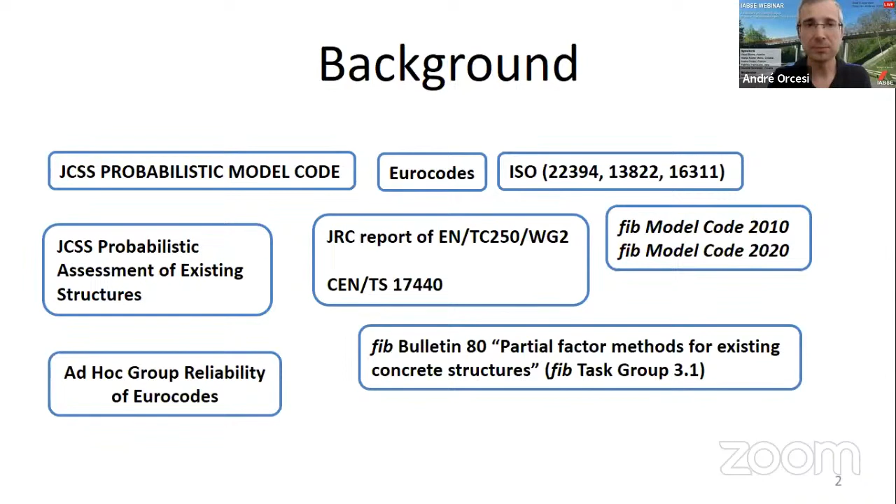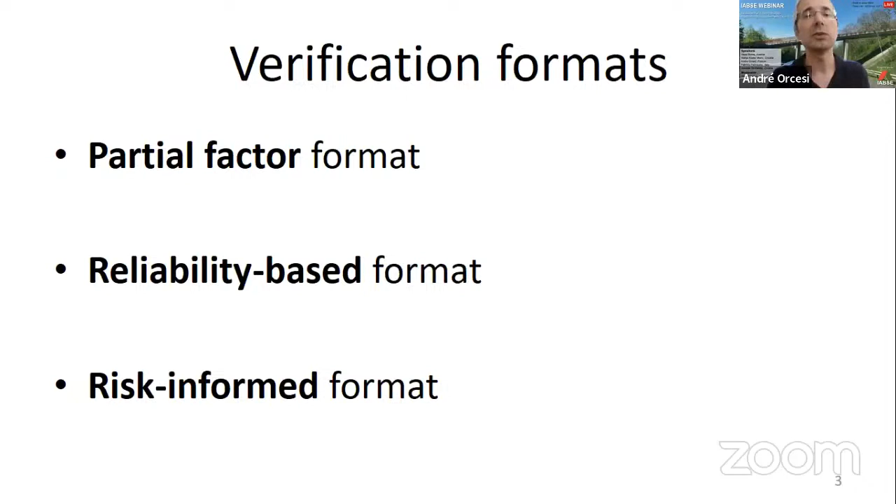There are three main formats that we can develop, and today we are going to talk about the two first ones. The first one is the partial factor format, using partial factors, and the second one is the reliability-based format. Then if you include the consequences, you can reach the risk-informed format.

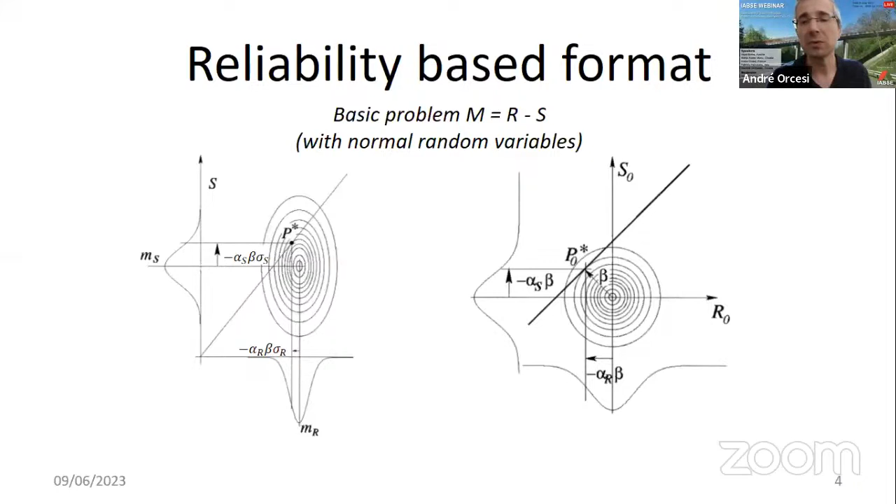So just a few words about the reliability-based format: in this format we consider a probabilistic level for the different variables, and we try to research what we call the design point in the standardized space that you see on the right. Then when we find this point, we come back to the physical space of the variables to identify this design point, and then it is possible to move to the partial factor format.

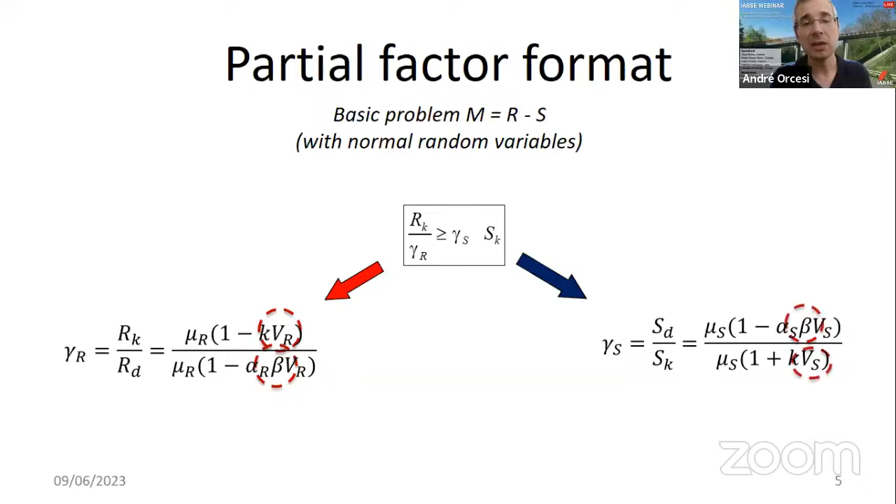So whether it is a resistance variable on the left or an action variable on the right, we calculate this partial factor as a ratio of a characteristic value and the design point value for this particular variable. This implies having information on the variability, like the coefficient of variation, and what we call the reliability index, called beta. So this was some kind of basic problem, but we can generalize to different types of variables.

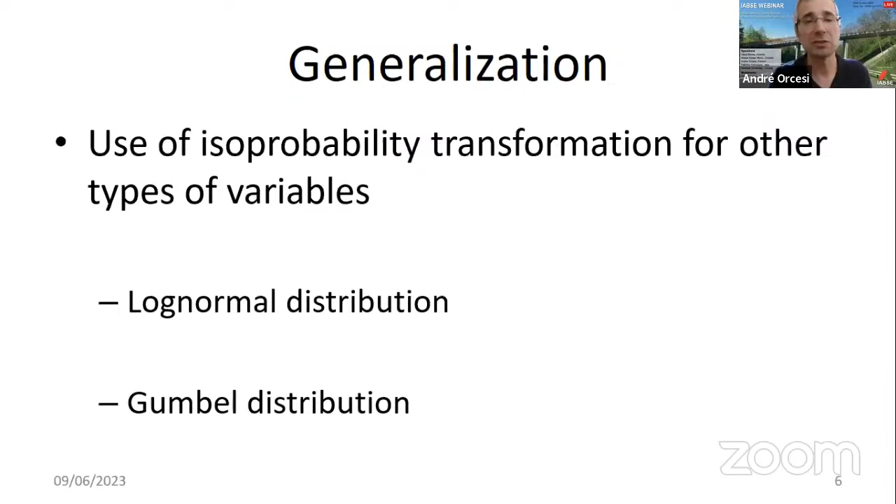I showed some results for normal distributions, but there are several other distributions like log-normal or Gumbel distributions that we manage in this type of assessment problem.

And then we come to the formats that are generally used when assessing structures, relying on partial factors. It can be fixed partial factors, considering a cluster of cases, and then we fix the partial factors to be used in the determination of the assessment effects, the EA, and the resistance variables, or we can move to a format where we try to adjust the partial factors if we have additional information for a particular case study.

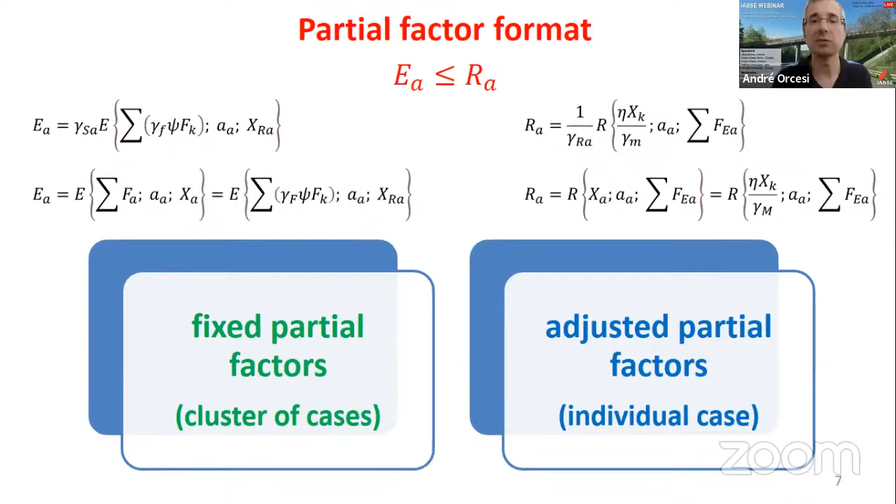So today we are going to illustrate that with case studies. And what we will also illustrate, relying on recent documents from the Eurocodes and FIB as you can see on the top right, is that when we try to adjust the partial factors for individual case studies, we can do that in different ways.

We can have what we call a single partial factor, where one factor for a particular variable will cover the different types of uncertainties—material property, geometrical variables, and resistance uncertainties—on the left. Or we can separate the partial factors if we consider first the material property, then the uncertainty of the resistance model, and the uncertainty of the geometrical variable. We will illustrate these two different ways of considering the uncertainties when we try to adjust the partial factors.

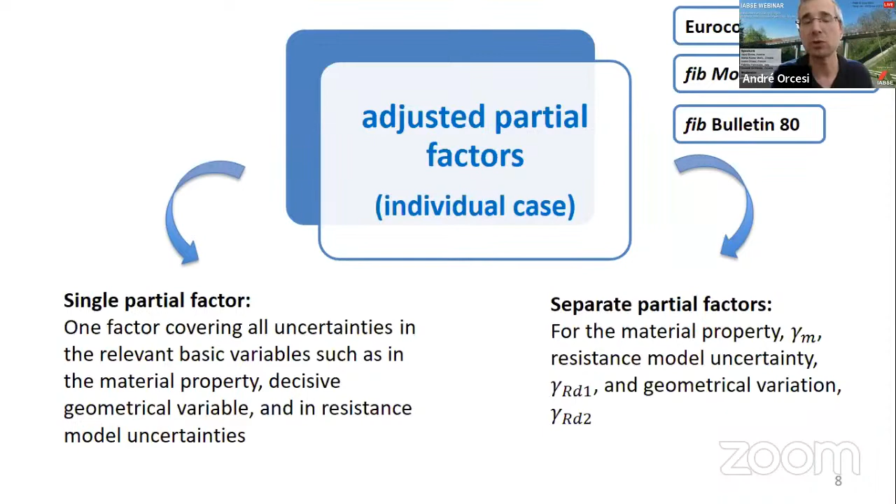Now I will shortly introduce the two case studies that we will present today. The first one is a reinforced concrete slab bridge built in Germany in the 1970s, and you see here a view of this bridge. First, we will apply a semi-probabilistic format with fixed partial factors.

Then we will show if we adjust the partial factors relying on single partial factors as well as separate partial factors. What will be presented is the influence of the number of in situ concrete tests when we try to get information from in situ. And then finally we move to the higher level of assessment, the full probabilistic analysis applied to this case study, relying on what we call the first-order reliability method.

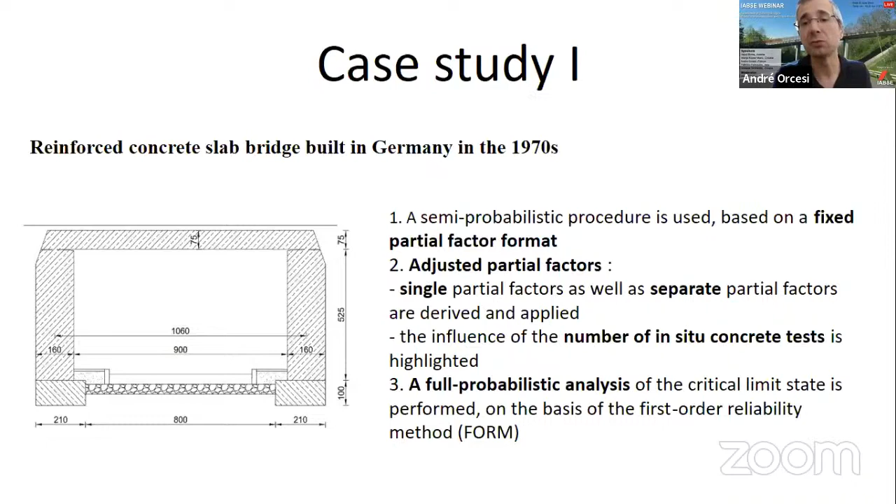Then we will present a second case study, a continuously reinforced concrete slab bridge built in 1961 in Croatia. We will have a similar three-step approach, starting first with fixed partial factors, then adjusting the partial factors, and moving to a full probabilistic analysis. We will illustrate the results using both the LM1 action model from Eurocode and site-specific traffic load models, to show these differences with this case study.

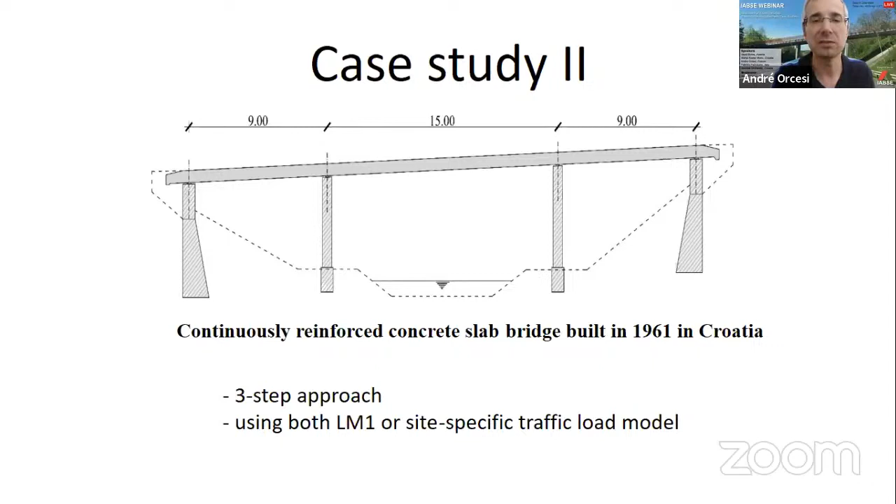Finally, the results presented today will be available soon in a SEI journal paper from the IABSE journal. This paper is almost in the way of being published, so you will have more information soon available with this paper. And with that, I finished this short introduction, and I'll give the floor back for the next presentation.

I will talk about the first example, case study number 1, including a brief introduction on the case and the material partial factors. Then the case will be completed by Vazul Boros immediately after me.

The background: this is a very simple bridge. For this example, we drew inspiration from a real case study, but we made some changes to the original one in order to better highlight issues relevant to probabilistic and semi-probabilistic approaches. This bridge is a reinforced concrete bridge built in Germany about 50 years ago. The analysis will be limited to the deck, which is a 75 centimeter deck with a net span of about 9 meters.

The assessment of concrete strength has been done directly on the deck using the approach given in EN 13791 by drilling 8 cores and calculating the in situ characteristic value of concrete using the approach given in section 8. I don't have much time to go into detail, but all the data are given in this section of the code.

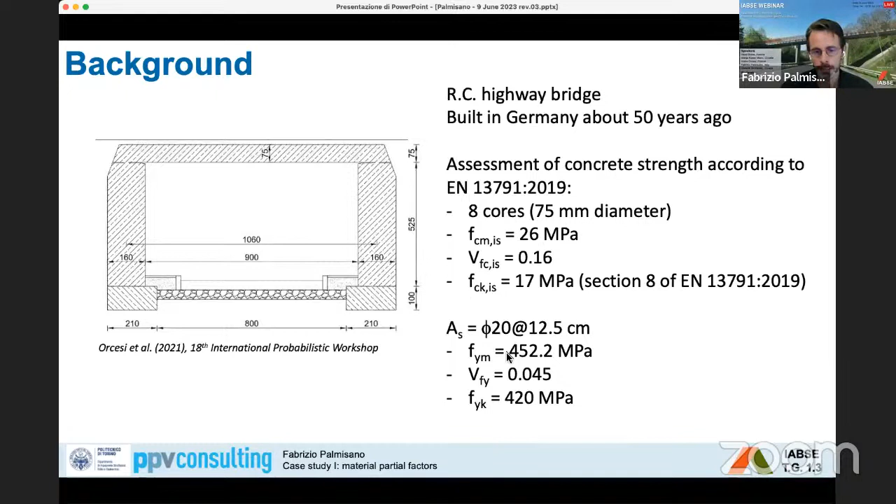The reinforcement of the slab is composed of 20 millimeter bar diameter with a spacing of about 12 centimeters. The yield strength has been assessed by taking samples and testing in the laboratory, and the characteristic value has been obtained using a log normal distribution.

Before talking about the material partial factor, we have to determine FCK, the characteristic value of concrete strength, from in situ tests, because what we obtain from EN 13791 is the value of FCK in situ, derived from test cores drilled into the concrete. However, all the formulations given in the code, for example in the Eurocode, make reference to FCK. So it is necessary to pass from FCK in situ to FCK.

I will show you the approach that we have used, which will also be given in the case study in the forthcoming Annex I of the second generation Eurocode.

This approach is based on the assumption that the in situ strength is the product of 3 parameters: the resistance of a cube specimen of concrete FC, a parameter eta core actual that is a reduction factor accounting for damage sustained during core extraction, and an in situ factor eta IS which takes account of the effect of curing, effect of consolidation of fresh concrete, and anisotropy.

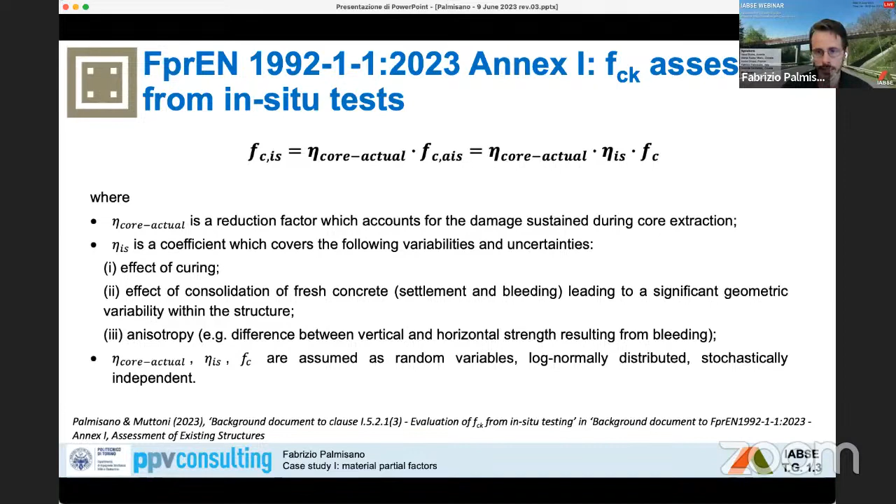These variables are assumed to be random variables, log normally distributed, and stochastically independent. By assuming the parameters given in the new Annex A of the second generation Eurocode, and others taken from a recent study by Moccia et al. 2020...

...it is possible to obtain a factor applicable to FCK in situ to obtain FCK. And this factor in this case is more or less equal to 0.85.

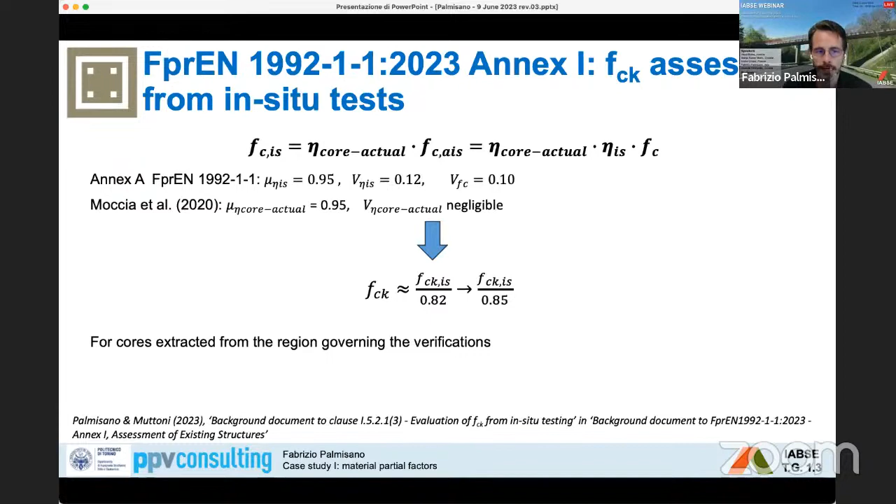However, we should take into account that in some cases the cores are not taken directly from the region governing the verification. In those cases, we have to consider also the difference in resistance between the top and the bottom of the member or element.

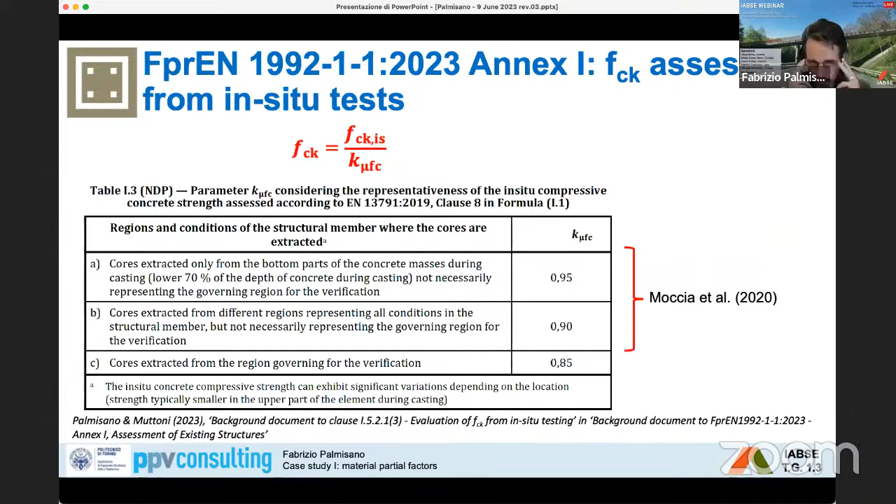The Eurocode has used a recent study by Moccia et al., and by using this study and the same approach I already showed, three different coefficients are derived for these cases. All the details will be included in the background document to Eurocode 2.

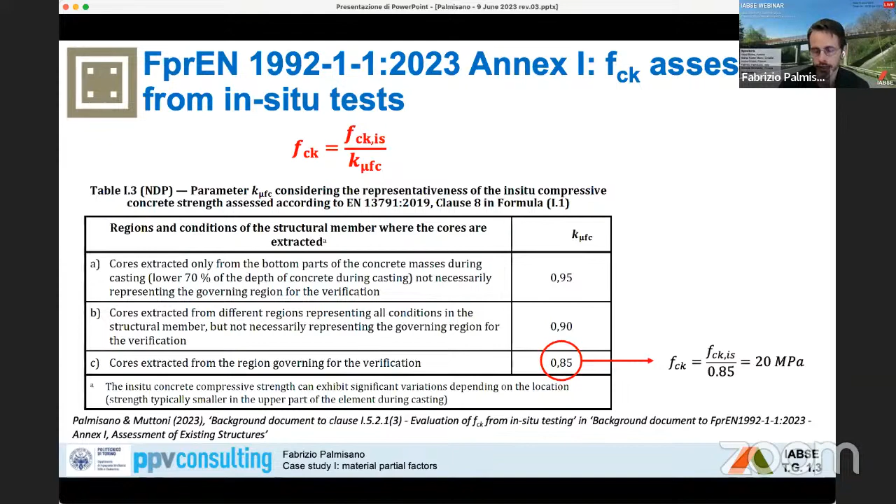However, in our case study, the cores have been drilled directly into the deck, so the coefficient to be taken is 0.85 and FCK is equal to 20 megapascal. Let's move to the partial factor.

First, we have to talk about the fixed partial factors. The current Eurocode does not differentiate between existing and new structures, so we have referred to the partial factor given for new structures for a reference period of 50 years. These are equal, as we know, to 1.5 for concrete compressive strength and 1.15 for reinforcing steel.

In general, it is possible to use this fixed partial factor directly if, first, the coefficient of variation of materials is very similar to those assumed to calculate the partial factor for new structures, which is the case here, and second, if the target reliability index beta is the same as that given for new structures.

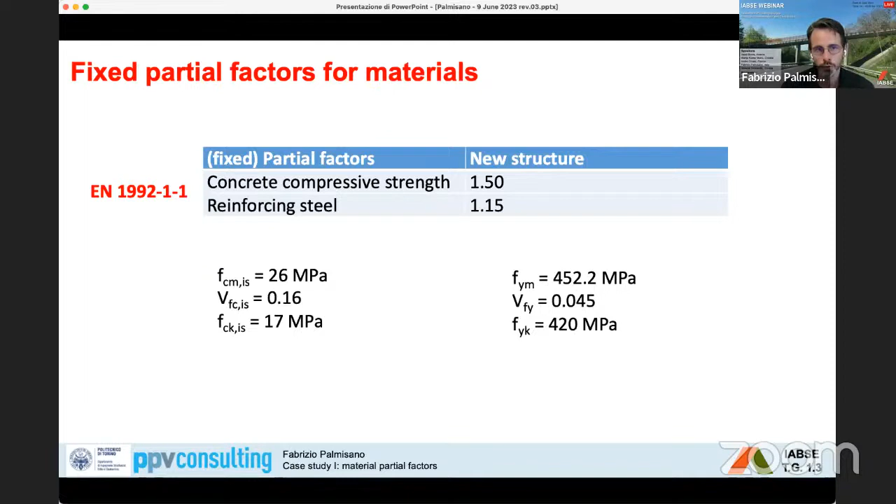In our case, we have considered an existing structure, and we have reduced, as shown in the previous webinar, the target reliability index from beta equal to 3.8 to beta equal to 3.3. So the necessity to adjust the partial factor arises.

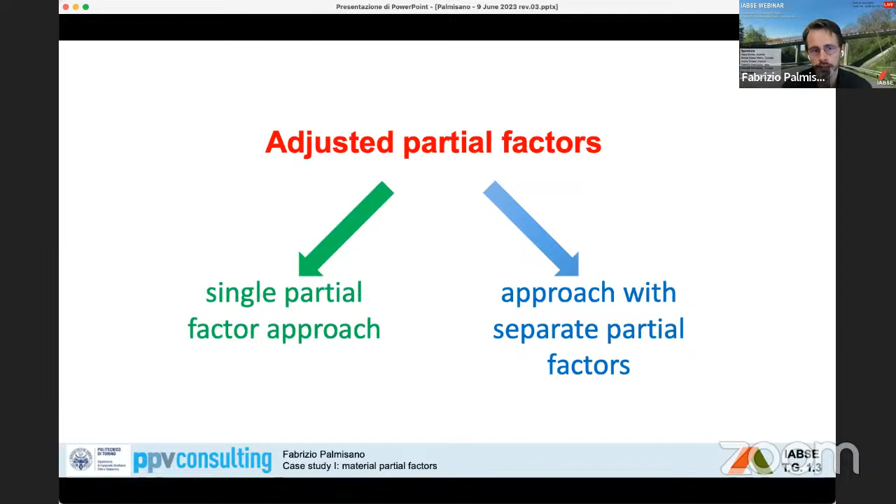So let's move to the adjusted partial factors. As Andrea has already said, we have used two different approaches: the first, called the single partial factor approach, and the second, called the approach with separate partial factors.

For the first approach, the single partial factor approach, we make reference to the forthcoming Eurocode 2 and to FIB Model Code 2020 that will include this approach. The basic assumption is that the general variable of concrete strength, RC, is a product of FC, the compressive strength of concrete determined from samples taken during casting, the in-situ factor IS, and the geometrical and model uncertainties.

All these variables are assumed to be statistically independent and log-normally distributed. By making this assumption, it is possible to calculate the gamma factor for concrete as the ratio between FCK and the design or assessment value of RC. The expression is an exponential function, which depends on the sensitivity factor.

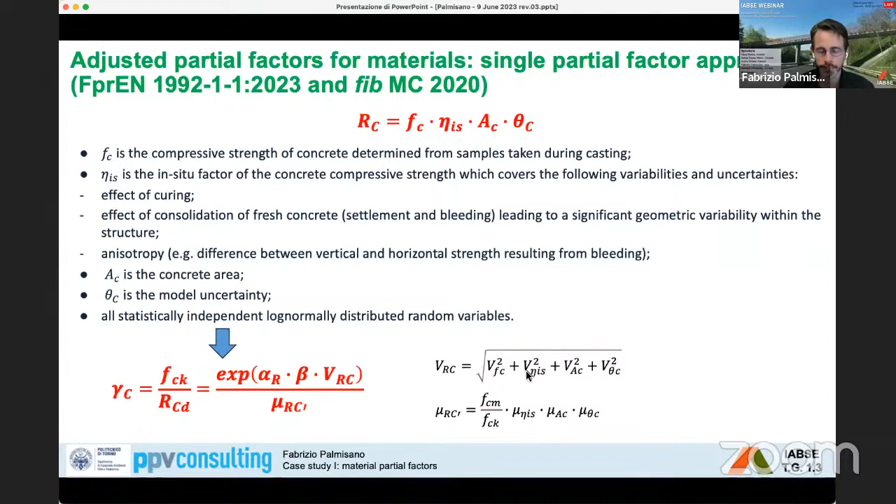For dominant variables we can assume the sensitivity factor equal to 0.8 for resistance, the beta target value—the target index that, as I've said, in this case will be equal to 3.3—the coefficient of variation of RC, which is a function of all four parameters, and the bias factor of RC, which is also a function of all parameters.

However, this formulation is correct for the structure when we assess FC, the FCK. For existing structures, we assess the in-situ value.

So a modification is needed, and this modification will also be included in the second generation Eurocode 2. It will be a function of the sensitivity factor, the beta factor, and also the number of test results, because if the number of test results is low—lower than 30—the random function to be assumed is more similar to a Student's t-distribution than to a log-normal function.

However, we can reduce this scatter by using the formulation I've just shown, by increasing the number of specimens—for example, from 8, the minimum requested by EN 13791, to 10, 16, and so on.

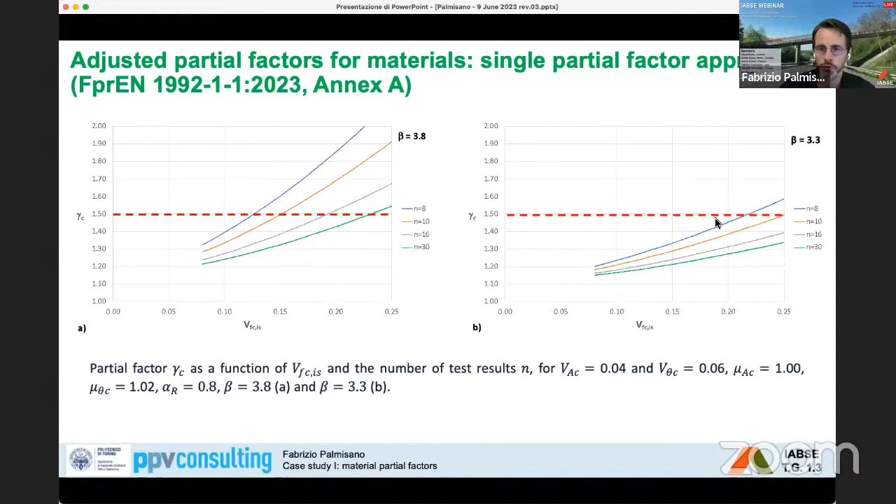It's also worth noting the great influence of the target reliability index on this evaluation. For example, if we pass from beta 3.8—more valid for a 50-year reference period for a new structure—to beta 3.3 for an existing structure, there is a strong reduction in the material partial factor. In many cases, even for a coefficient of variation of about 0.2, the material partial factor for concrete is lower than the one we assume for new structures.

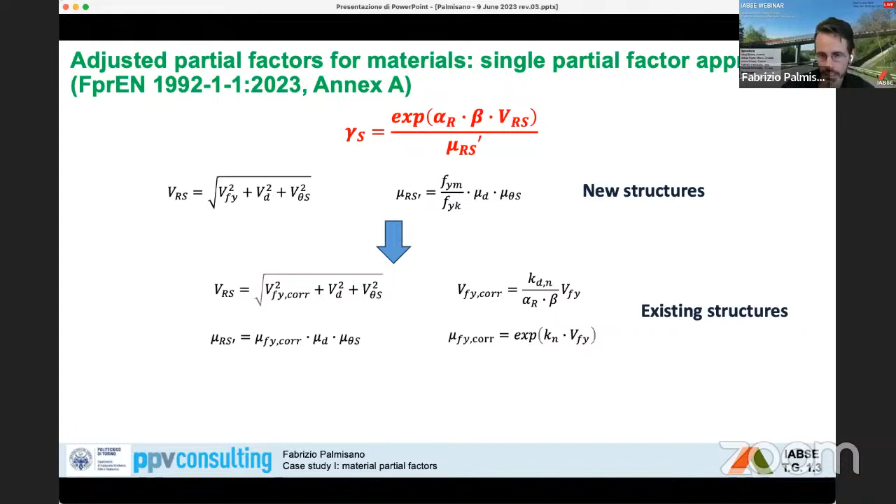The same expression is included in the forthcoming Eurocode 2 also for steel reinforcement. The only difference is that there isn't a distinction between the in-situ value and the value for a new structure in terms of strength, but the formulation is the same, with similar assumptions.

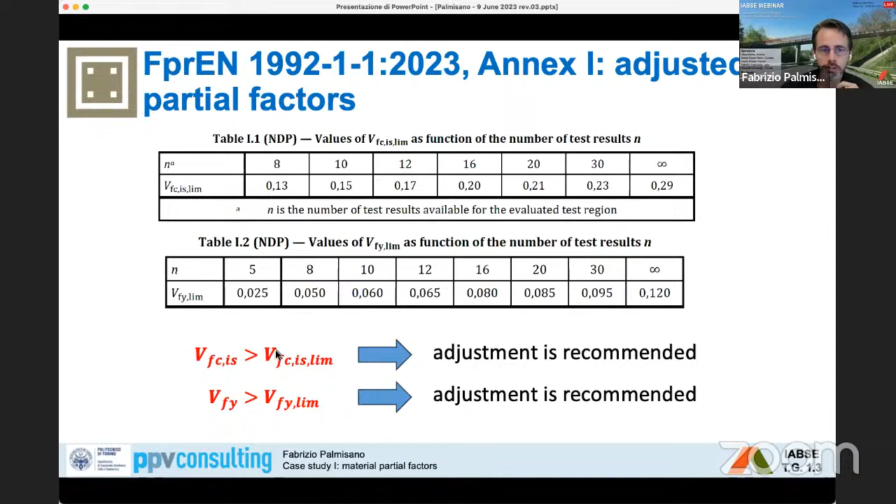It's worth mentioning that in Annex I of the forthcoming partial factor provisions, the adjustment will be recommended—not just permitted—if the coefficient of variation for either concrete strength or steel reinforcement is greater than a limit value given by this annex, which is a function of the number of test results. This is because in such cases, we are not on the safe side anymore, as shown in the previous graph.

So, by applying this approach to the case study, assuming a beta factor of 3.3, a sensitivity factor of 0.8, and all the values explained here—and better explained in the forthcoming journal paper—we obtain gamma C equal to 1.36 and gamma S equal to 1.11. Both are lower than the fixed partial factor values for new structures, and the difference is not mainly due to the coefficient of variation of material property, but mainly to the reduction we assumed for the beta factor.

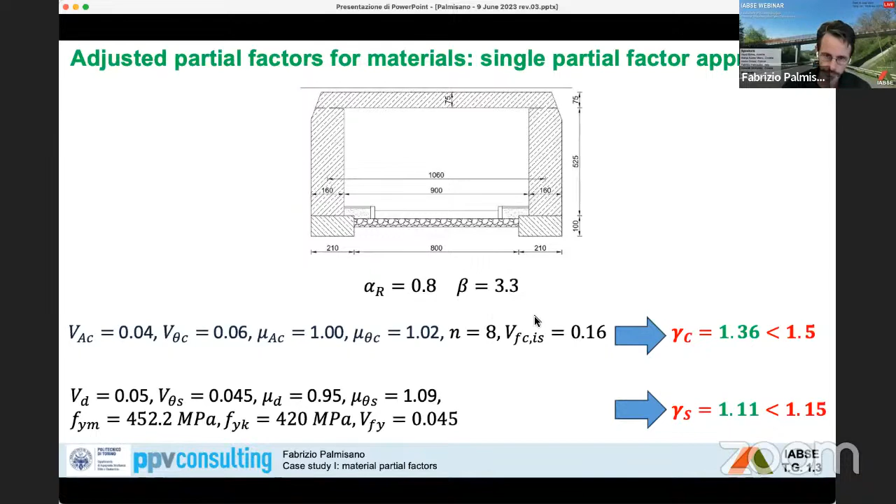Let's move to the approach with separate partial factors. This approach will not be included in the second generation Eurocode 2, and in the Model Code 2020. So we have made reference to the fib Bulletin 80.

In this approach, the gamma factor for material is the product of 3 different partial factors: one takes account of the uncertainty relevant to the materials, another to the resistance model uncertainty, and another to geometrical uncertainty.

The peculiarity of this approach is that we can assume a sensitivity factor, for example, equal to 0.8 for a dominant variable such as the material resistance, while at the same time assuming a different sensitivity factor for other variables. For example, for non-dominant values, according to König-Hosser 1982, it can be assumed as 40% of the value assumed for dominant variables.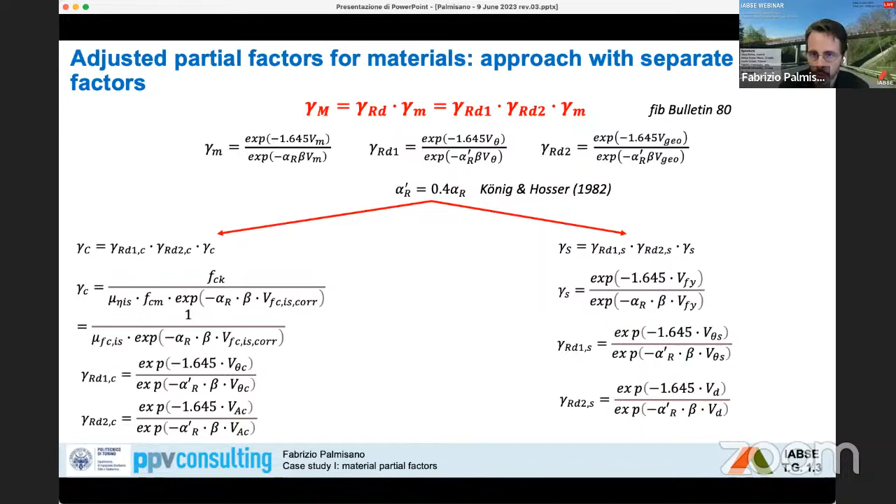So by making the same assumption as the previous approach and performing some calculations, we can obtain the specific formula to be used in the approach with separate partial factors. Again, all the details will be included in the journal paper.

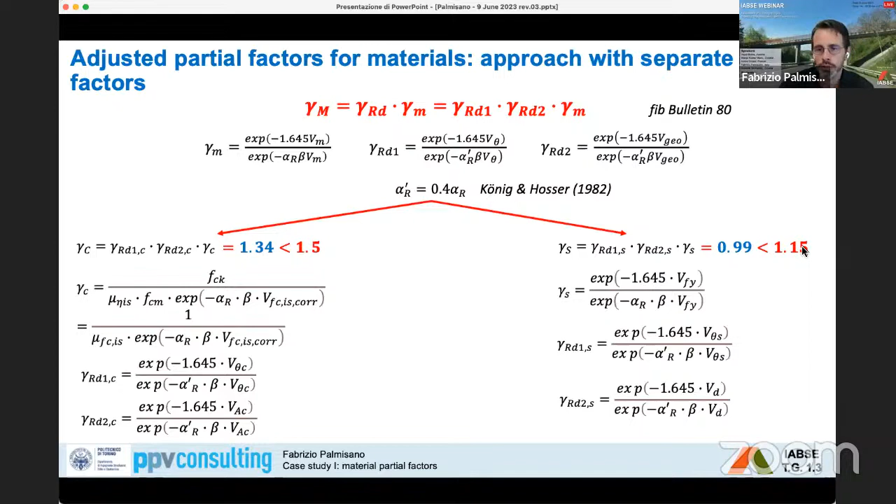For the case study, we obtain that the concrete gamma factor is equal to 1.34, while the steel gamma factor is equal to 0.99. In both cases, again, they are lower than the one for new structures, and again, the main difference is due to the assumption of a lower beta factor.

So let's conclude by comparing the 3 different approaches. Using the adjusted partial factor method, in all cases, since we have reduced the beta factor and we have a coefficient of variation of materials very similar to the one assumed for the structure, we have a reduction of the partial factor from the fixed partial factor method to both methods of the adjusted partial factor.

However, we can see a very important difference between the two approaches of adjusted partial factor with reference only to steel reinforcement, because for the case of concrete compressive strength, the results are very similar. For steel reinforcement, there is a reduction of more than 10%.

This reduction is mainly due to the possibility, in the approach with separate partial factors, to use different sensitivity factors and to use only the greater value of the sensitivity factor for a dominant variable. In cases where there are variables with very similar coefficients of variation, this approach avoids overestimating the material partial factor, as happens in our case study.

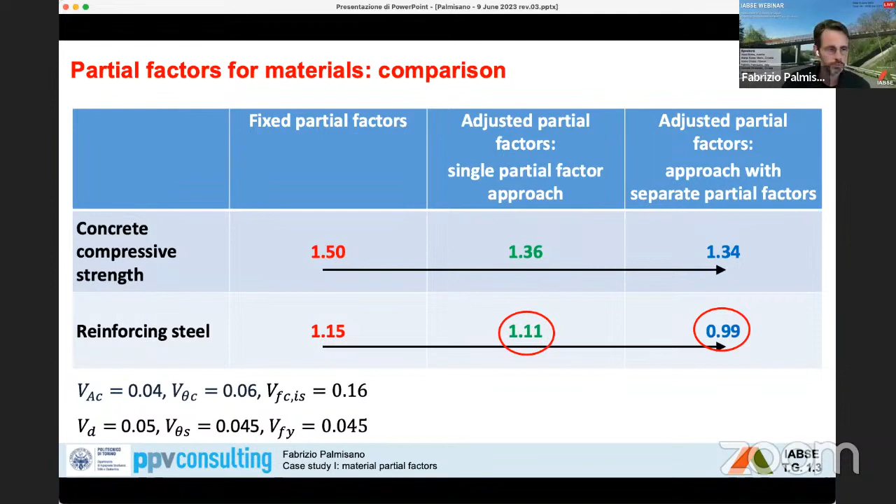And with this, I've completed my example, my part, and I will pass the baton to Vazul. Thanks a lot for your attention.

Yes, thank you very much. So I will continue now with the action part for case study 1, and also introduce you to some of the results that we obtained from these approaches. Obviously, this part of the presentation will be very similar in structure to the previous one.

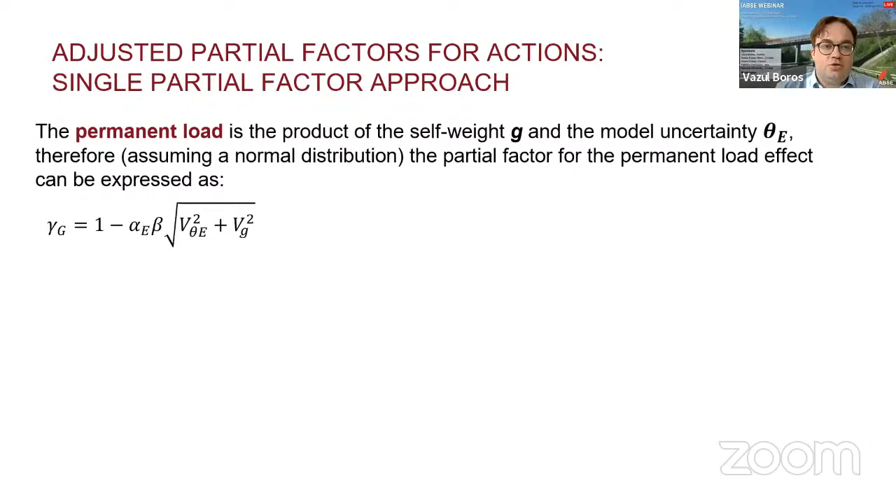So first, I'm going to talk a bit about the partial factor formats, starting with the single partial factor approach. Here, just like with the resistances, we distinguish between concrete and reinforcement steel. We need to distinguish between the permanent loads and the live loads or traffic loads in the case of the bridge. The permanent load basically consists of the self-weight itself, and just like with the resistances, also the model uncertainty. Therefore, if we use the single partial factor approach, the variation coefficient also consists of these two factors—it's basically the square sum of the two.

Also for actions, we need to consider the sensitivity factors, which are here 0.7 or minus 0.7, just like given in the Eurocodes. And of course, also on the action side, we reduce the reliability index for existing structures to 3.3 for a 1-year reference period.

What is, of course, different here is the coefficients of variation. So we have a coefficient of variation for the model uncertainty and for the self-weight of in situ concrete, both taken based on the FIB Bulletin 80. If we calculate the adjusted partial safety factor with these values, we obtain a partial safety factor of 1.2, which is also significantly lower than the 1.35 that we would use for a new structure.

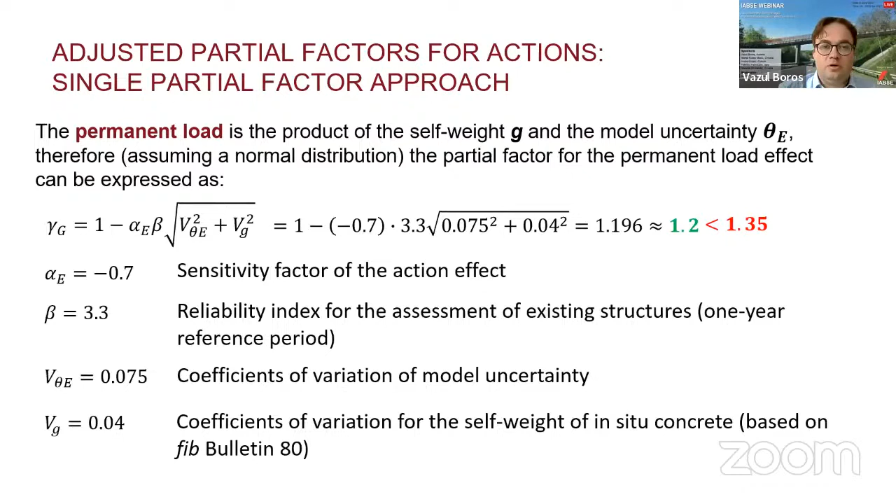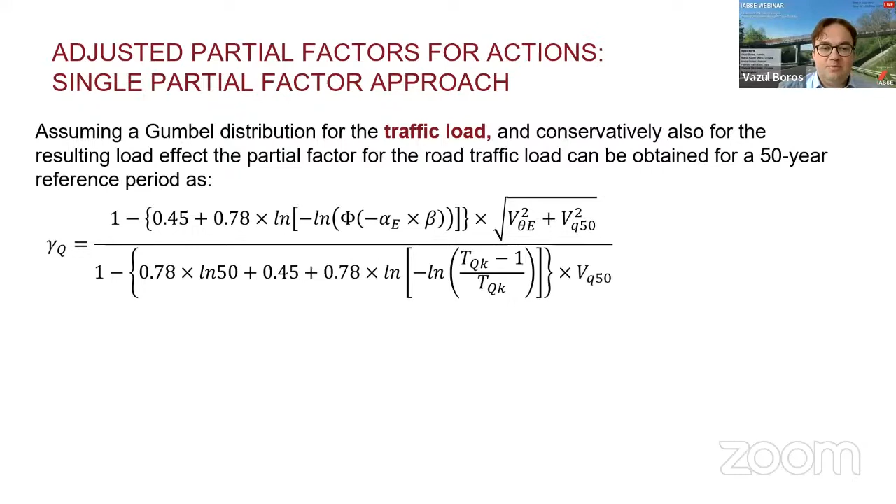So if we move on to the single partial factor approach for the traffic load, we have to assume a Gumbel distribution according to the FIB Bulletin 80, which makes the calculation a bit more complicated. However, the principle is the same—it basically only depends, once again, on the sensitivity factors and the reliability index, which is significantly reduced.

Once again, the coefficients of variation, both for the model uncertainty and also for the traffic load, are of importance. And one additional thing for the traffic load which is important is the definition of the characteristic value of the traffic load, which in the Eurocodes is given as the load with the 1,000-year return period.

And then if we calculate the partial safety factor for Gumbel distribution with these parameters, we get a significant reduction of 1.17 instead of the 1.35, which you would have for traffic loads.

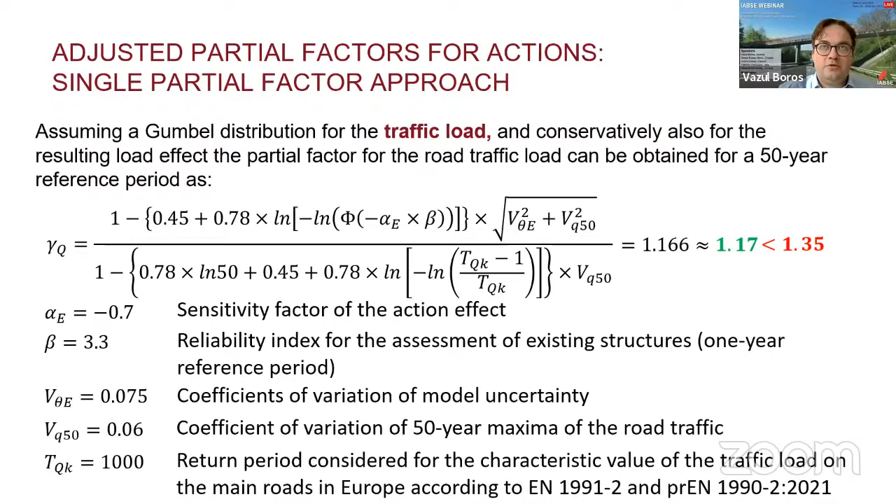So this was the single partial factor approach, and now we will also address for the actions the approach with separate partial factors, as shown in the Fib bulletin.

So here, as we've seen before, we can also divide up the permanent load into the product of a safety factor for the self-weight itself and another one for the model uncertainty.

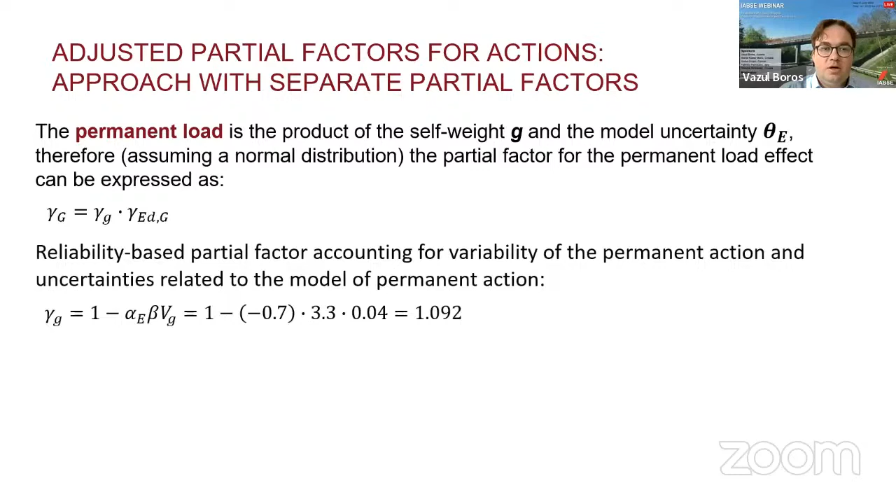The self-weight itself could be calculated to a partial safety factor of around 1.09, and the partial safety factor for the model uncertainty also here can be reduced with the factor of 0.4, as Fabrizio has explained, for the non-dominant part, which in this case is the model uncertainty.

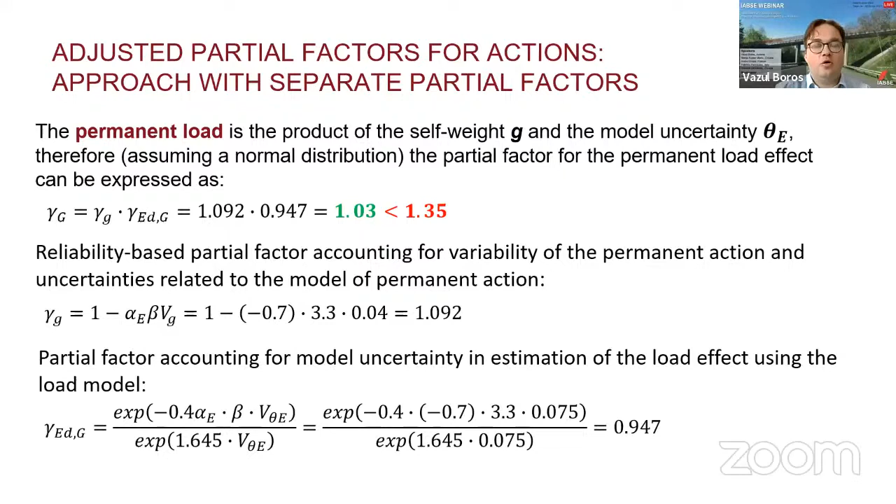And once again, if we multiply these two partial safety factors, we get the overall safety factor of 1.03, which is significantly lower than the 1.35 you would normally have.

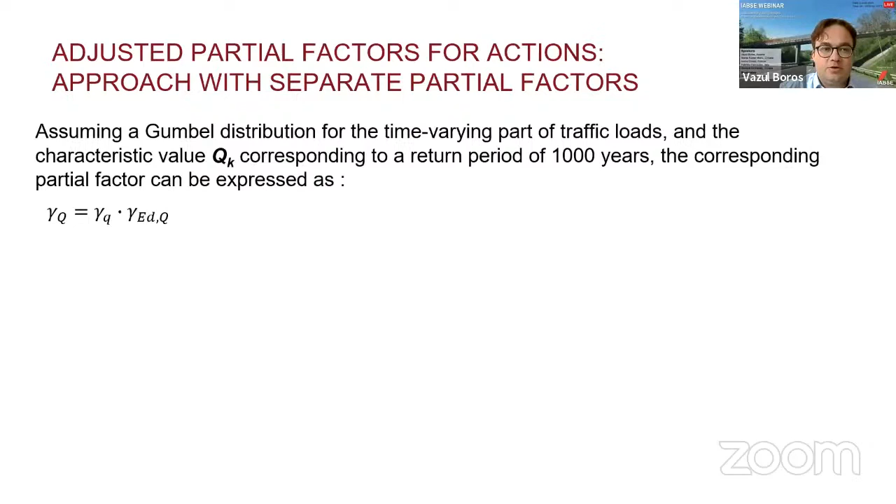So if we look at the separate partial factor approach for the traffic loads, we still assume the Gumbel distribution. And also here we divide it up into the partial factor for the live load itself and the model uncertainties. For the live load itself, with the Gumbel distribution, we can obtain a partial safety factor of around 1.07. And for the partial factor for the load uncertainty, once again with the reduction of 0.4 for the non-dominant basic variable, we get also around 1.07.

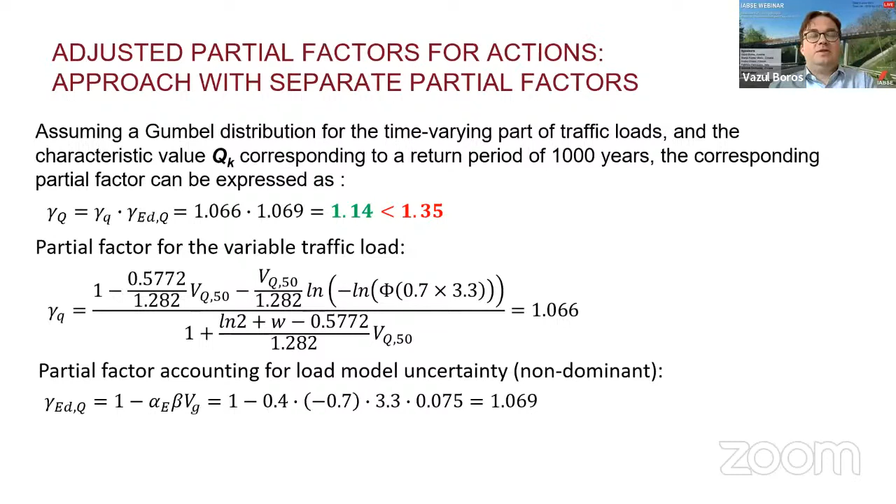So in total, the partial safety factor for the live load would be 1.14. So lower once again, as we would normally use with 1.35.

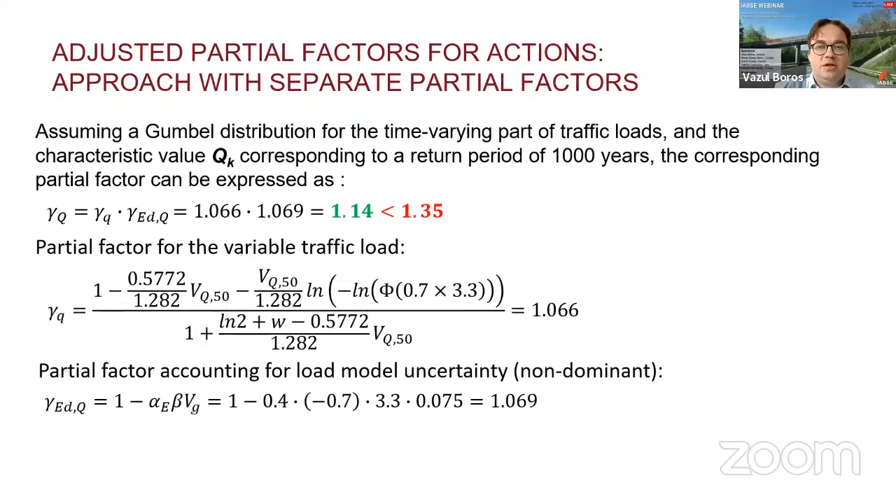So in the case of the actions, we didn't do any real measurements like we did with the resistances, but what we could do is something similar, which is to do some traffic simulations, actually considering the geometry and the load of the bridge. So here we assumed 5 different types of lorries, which we took according to the fatigue load model 4 of the Eurocodes, at least concerning their geometry - the axles and the axle geometry.

However, when it came to the weight distributions, since this was a bridge in Germany, we used some measurements which were, first of all, more recent than the Auxerre traffic that was considered in the Eurocodes back then, and also more close to our bridge since it was taken from Germany. This is all with the exception of Lorry 2, where no data was available, so there we had to refer to the Auxerre traffic. So anyhow, these were the weight distributions for the vehicles that we considered and the geometry.

And another issue which we asked ourselves is which type of dynamic amplification factor needs to be considered. So after some discussion in the group, we decided on an approach where the dynamic increment is basically decreasing with a higher weight of the vehicle, as you can see here. So basically, it is normally distributed with a mean and standard deviation of 41.5 divided by the vehicle weight in kilonewtons. So these were basically the parameters for the simulation.

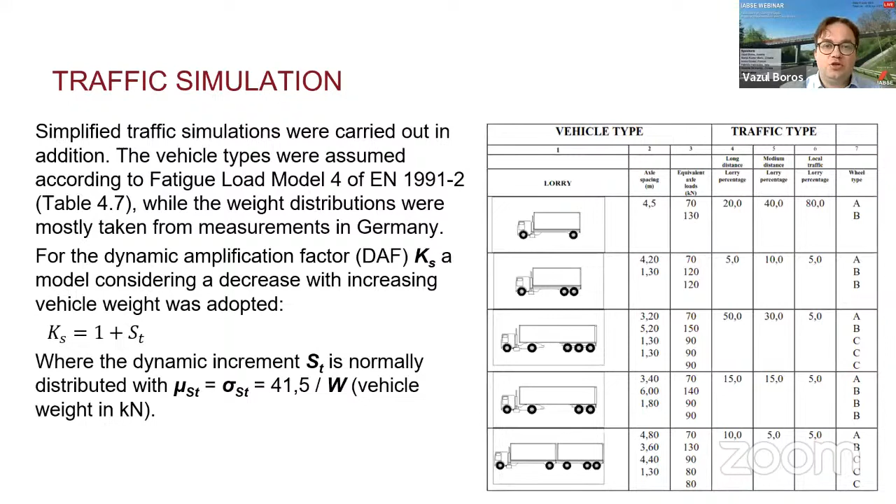And we simulated 2 years with 280 work days and distinguished different traffic categories, which are at least typically defined in the Eurocodes. So for the motorways, one with 2 million vehicles per slow lane a year, and one with 500,000 vehicles. And we also considered the probability of a second vehicle in an adjacent lane.

And after that, the results were approximated by a Gumbel distribution, as it is given, for example, in the Fib bulletin 80, and also in a more generalized approach with the generalized extreme value distribution. And if you compare the characteristic values which we would get from these approaches, you can see that while there is a difference, it's not very significant. And what is even more important, the characteristic values obtained are about half of that what you would get if you would use the actual load model 1 from Eurocode 1.

So there is a tremendous potential in reducing the traffic loads on the bridge if you consider the real bridge traffic and geometry. This is actually in line with several investigations which have shown that for short span bridges, the Eurocode model is rather conservative.

For this bridge in particular, we could see that this is really very much the case. If you are more interested in these traffic simulations, there has also been an IABSE paper at the conference in 2021 in Ghent, Belgium, where we discussed these calculations in more detail.

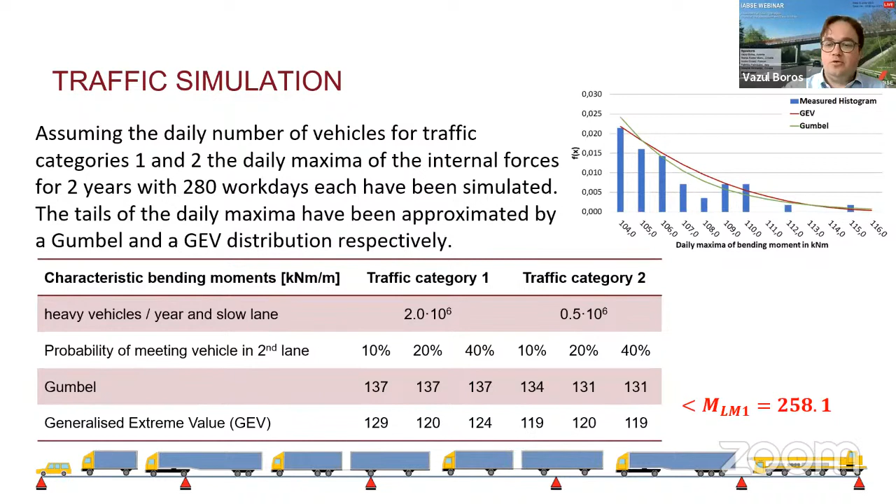And if we consider the simulations I've just shown, you could further decrease the characteristic loads for the actions, which would further reduce these percentages by about 20%. So you would be able to prove that the structure is actually safe after all.

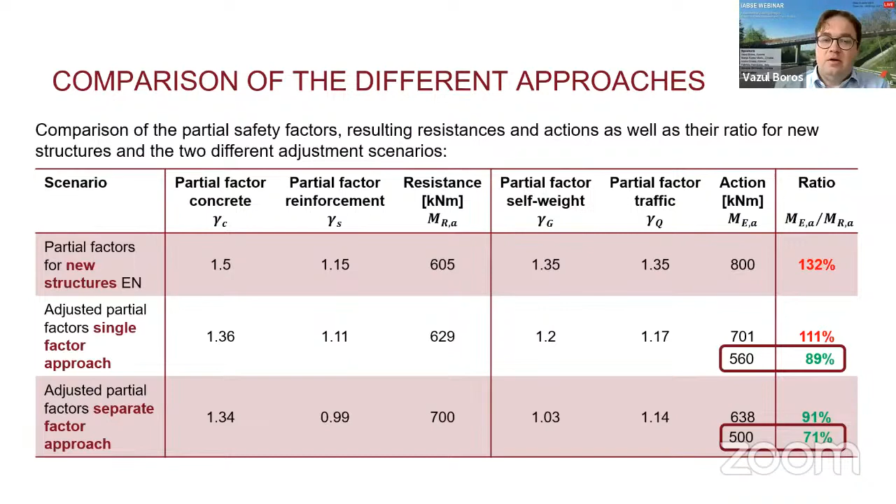As we said, there has also been a further, more sophisticated approach to check the safety of the structure: a full probabilistic analysis using the First Order Reliability Method, FORM. This basically used the formulas for calculating the bending moment resistance and the acting bending moment, based on the notations shown in the present picture.

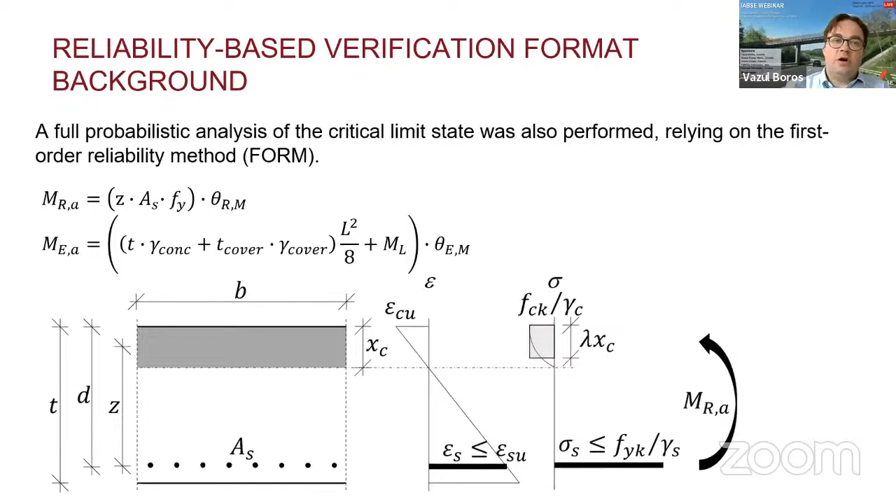What is even more important for such a probabilistic analysis is the basic variables assumed. On the resistance side, it was the concrete compressive strength and the steel yield strength, as well as the slab thickness, which also had some effect on the self-weight, and of course the model uncertainties for resistances. On the action side, it was the concrete density, the bridge span as a geometric parameter, and the density of the cover—the asphalt layer—as well as its thickness, and also the model uncertainty and the moments due to traffic.

But here we distinguished case 1, which was basically the Gumbel distribution based on fib Bulletin 80, and case 2, where we also used the Gumbel distribution but from the simulation, with a significantly lower level and also a lower coefficient of variation.

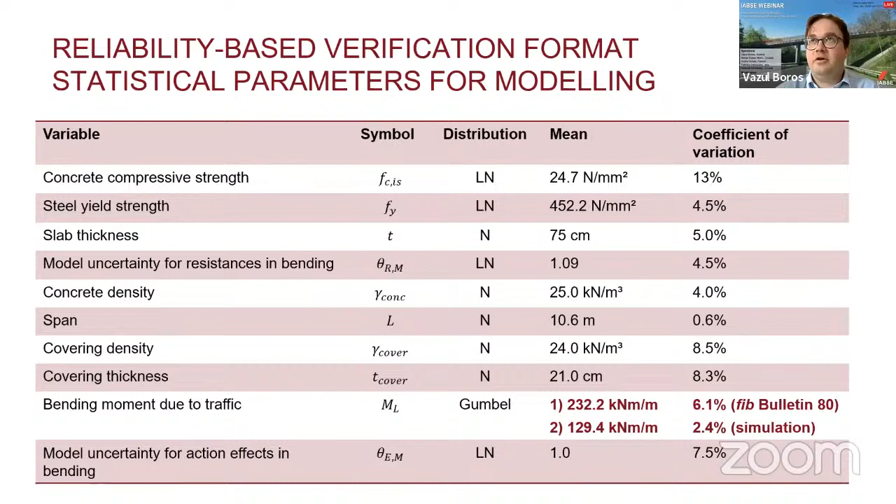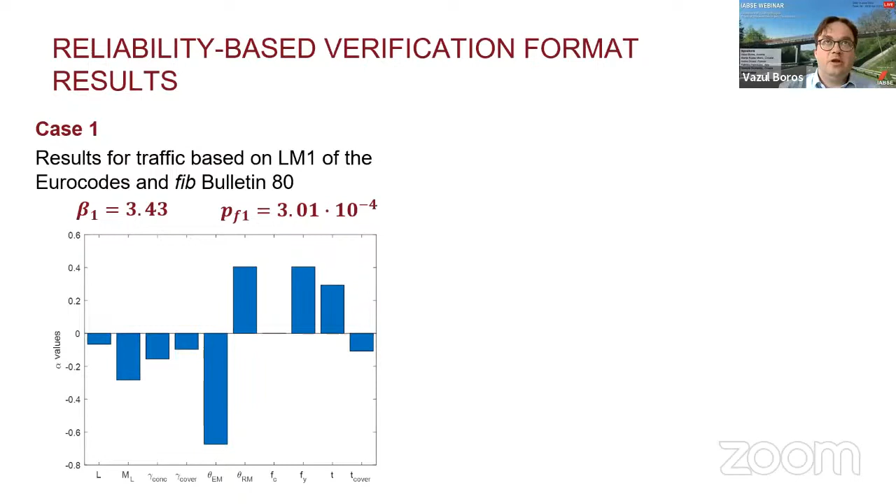So if you compare the results, for case 1 we got a reliability index beta of around 3.43, which aligns well with the calculations using partial safety factors, since we were approximately around 100%, depending on which way you look—90 to 110—with a reliability index of 3.3. And if you look at case 2 with the simulations, the reliability index increases significantly, so there a much higher reliability could be proven.

Maybe what is also interesting to note is the sensitivity factors of the different basic variables. You can see that with a decreased characteristic value in the traffic loads, the sensitivity of the moment due to traffic decreases significantly. And what I think is also interesting is that the model uncertainties of both actions and resistances have a very high influence on the results.

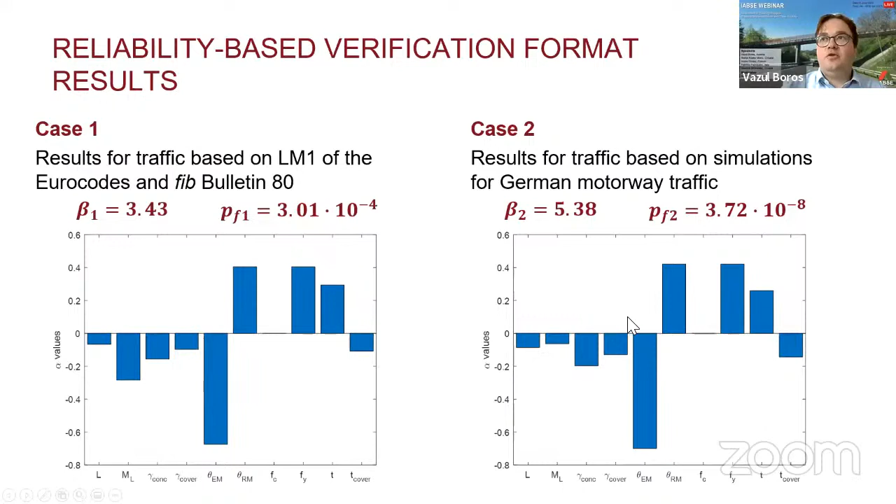So this was the summary for case study 1. And now I hand over to Maria for case study 2.

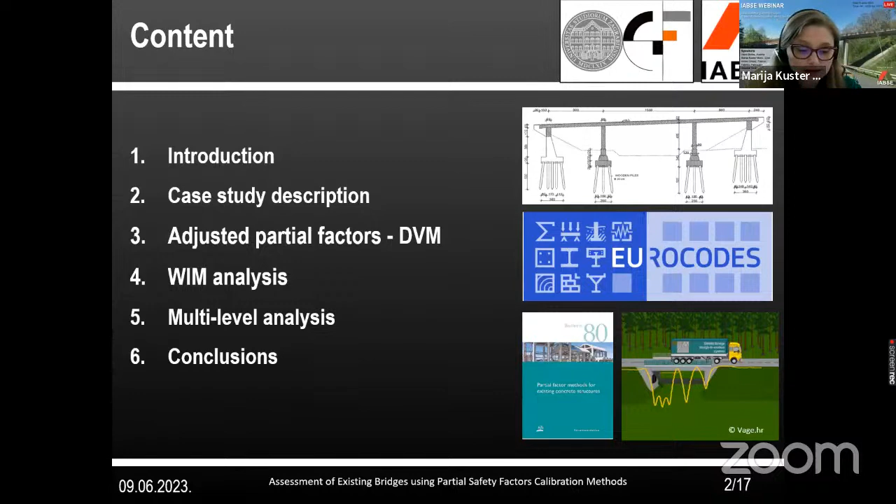The Croatian case study is prepared by Ana Mandić-Ivanković, Dominik Skokandić, and me, and will be presented by Dominik and me. I will start with the introduction, bridge description, and application of the design value method proposed in fib Bulletin 80. Then Dominik will continue with the WIM analysis, multi-level assessment, and conclusion.

So let's start. The second case study is a 3-span girder reinforced concrete bridge on a state road in Croatia. Assessment is provided in 3 steps. In the first step, the linear analysis is conducted using a semi-probabilistic partial factor format and the values for structural design of new bridges, along with traffic load model 1 according to Eurocode.

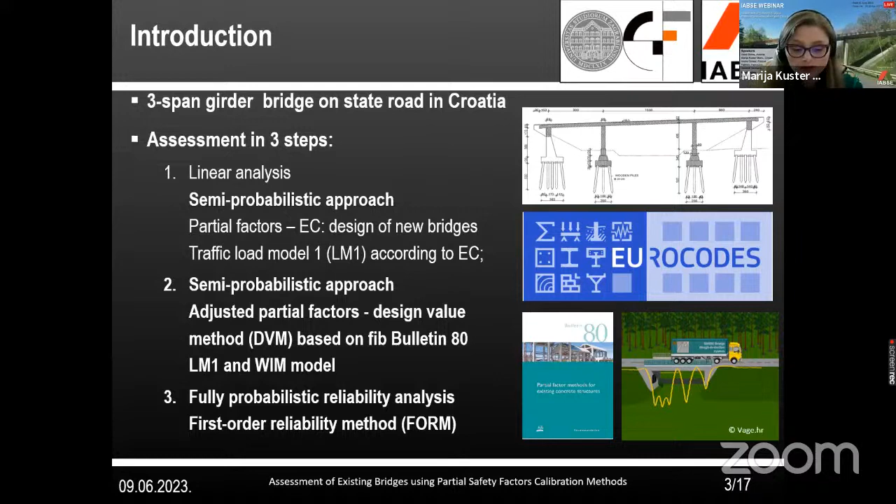In the second step, again a semi-probabilistic approach is used, but partial factors are adjusted using the design value method based on fib Bulletin 80, for both the reduced traffic load model 1 and the WIM model developed for this case study. Finally, in the third step, the assessment is performed using a fully probabilistic reliability analysis, relying on the First Order Reliability Method.

Croatian case study is Posedarje Bridge. The bridge was built in 1961. Bridge spans are 9, 15, and 9 meters, while bridge length is 33 meters.

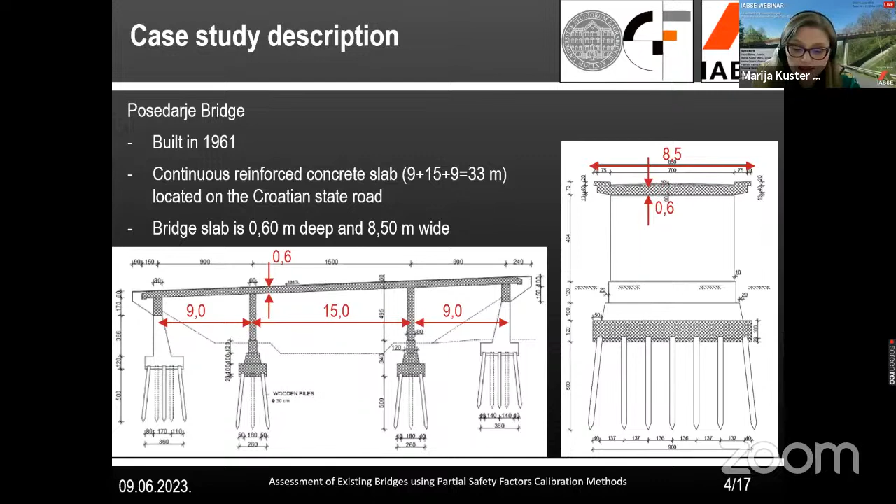The slab is supported by concrete hinges on piers and the first abutment, while on the second abutment, a movable bearing is placed. Bridge slab is 0.6 meter deep and 8.5 meter wide.

Bridge is designed according to codes from 1949, and designed concrete strength corresponds to C30/37 according to the Eurocodes, while reinforcing steel quality is S220B. Original design plans along with built-in reinforcement are available, including all structural elements.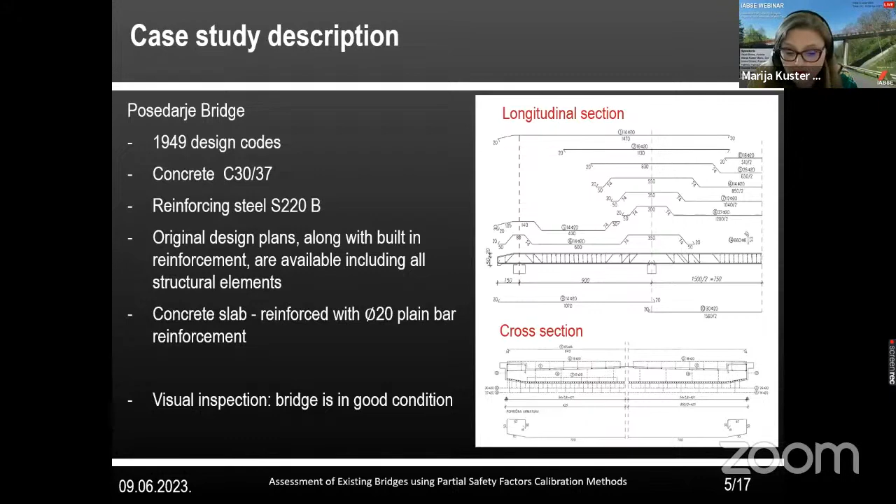In the second step of bridge assessment, partial safety factors prescribed in Eurocode for new structures are reduced using the design value method. According to draft FIB Model Code 2020, an annual target reliability index of beta 3.3 is considered for the medium consequences class.

The material factors for concrete and reinforcement are determined as shown, where gamma RD1 and gamma RD2 are recommended values for model and geometry uncertainties in FIB Bulletin 80, assuming a log normal distribution of material property. The material partial factor gamma M is obtained from this equation.

With the following coefficients of variation: 0.15 for concrete and 0.05 for steel. Alpha R is 0.7 and beta is 3.3.

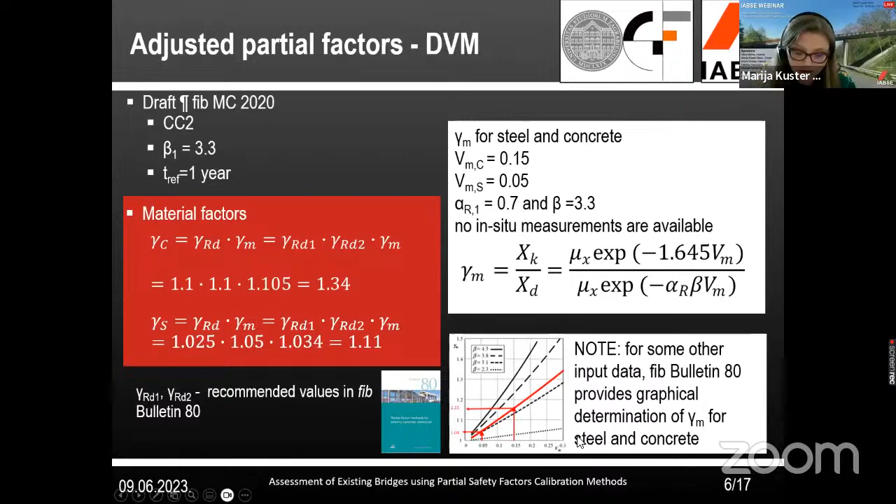Note that there is no in situ measurements available for this bridge. It's also worth mentioning that for some other input data, such as alpha, coefficients of variation, and beta, FIB Bulletin 80 provides graphical determination of gamma M for steel and concrete, which is a more user-friendly option.

Partial factor for permanent load, gamma G, is calculated using an approach similar to material factors, assuming normal distribution and the following coefficient of variation 0.1, alpha E is minus 0.8, and the same beta.

The value of gamma EDG used for this case study is based on the recommendation of FIB task group 3.1 and is equal to 1.07.

Again, for some other input data, alpha E and coefficient of variation and beta, FIB Bulletin 80 provides graphical determination of gamma G, but also for gamma Q.

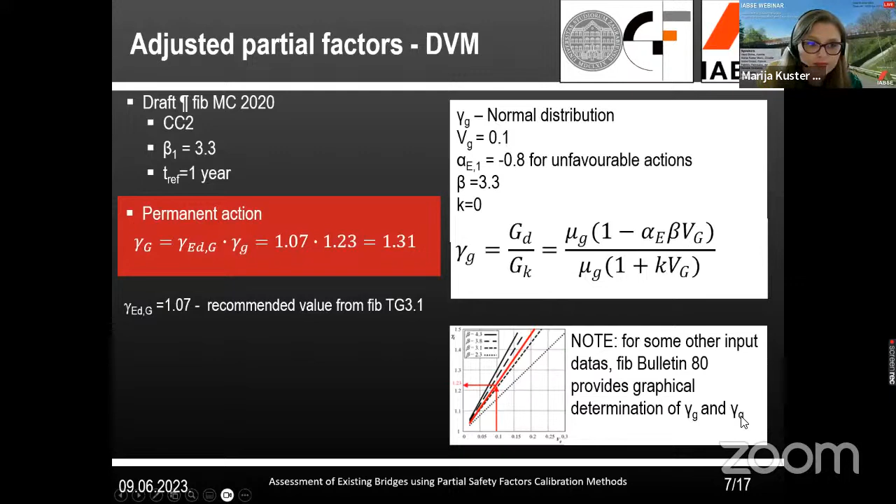Finally, the partial factor for variable load effects, in this case bridge traffic load, is calculated as a product similar to the one for permanent action. But the reliability base factor gamma Q differs for load model 1 and the WIM model, namely the coefficient of variation for the WIM model is much lower than the coefficient of variation for load model 1 from Eurocode.

More about the WIM model and further assessment will now be presented by Dominik. So this is all from me. Dominik, please continue.

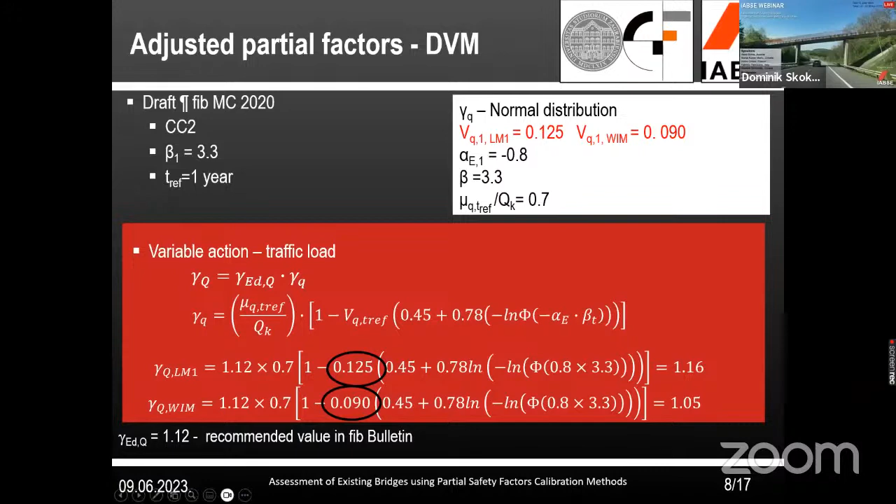Yeah, thanks, Marija. Could you please shut down your screen so I can share mine? Sorry. Hello everyone, okay, we will have the presentation in a second. Before I start, I have a cold, so I turned off my video because I feel bad, but I look even worse, so don't hold that against me.

As Marija said, I will now continue more regarding the traffic load modeling for the case study bridge in Croatia, and then I will provide you the results for all three steps or levels of that multi-level analysis.

But first, some basic introduction, though I guess you are all well acquainted with the traffic load models for new bridges. Precisely, these ones are from Eurocodes. Those are based on weigh-in-motion data, but only limited amounts, so they're very conservative, which is really good for new bridges, but it's not suitable for application in the assessment of existing ones.

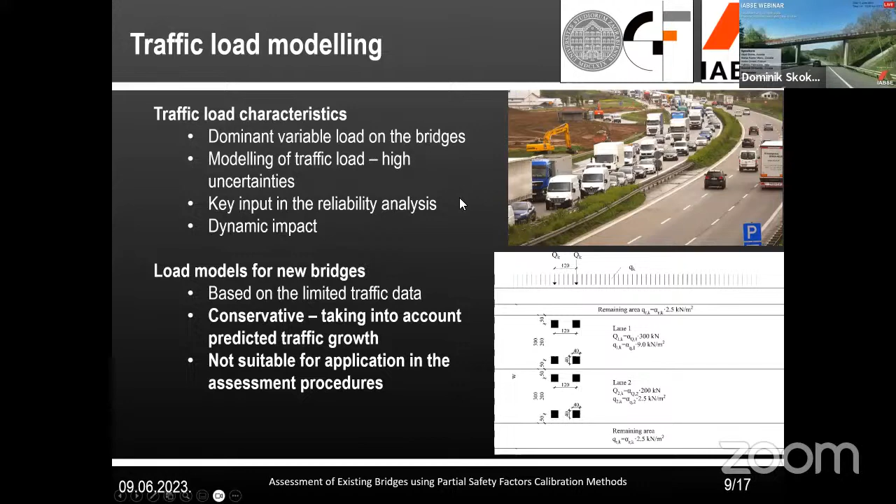The irony here is that when using weigh-in-motion or bridge weigh-in-motion technologies, like we used here on this case study bridge, you can directly measure the dynamic factor for each vehicle, and dynamic factor is decreasing with increased weight of the vehicle. So the dynamic factor for trucks and lorries, which are the ones we are looking at, because regular personal cars do not have any effect on bridge, is around 1.05, 1.06, which is a significant decrease when compared to the ones that Eurocode load models have already built in.

So for the case study bridge, we collected the traffic data and then calculated the load effect for each vehicle. That's a really simple procedure using influence lines for movable load. And a key factor here is extrapolation of that data, because there are several extrapolation methods, but that's not the topic for this webinar, so I will not go into details on that.

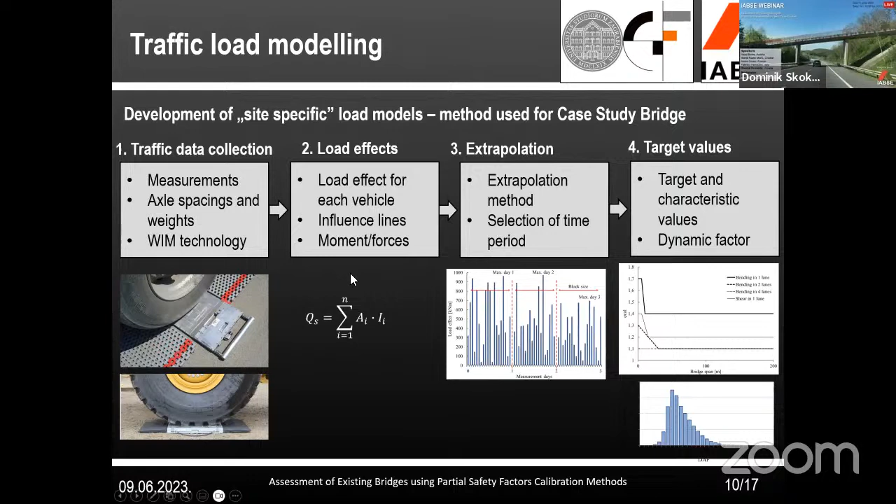And then the obtaining of target values. In our case, for the case study bridge, our target values are bending in the middle of the central span and negative moment on both piers.

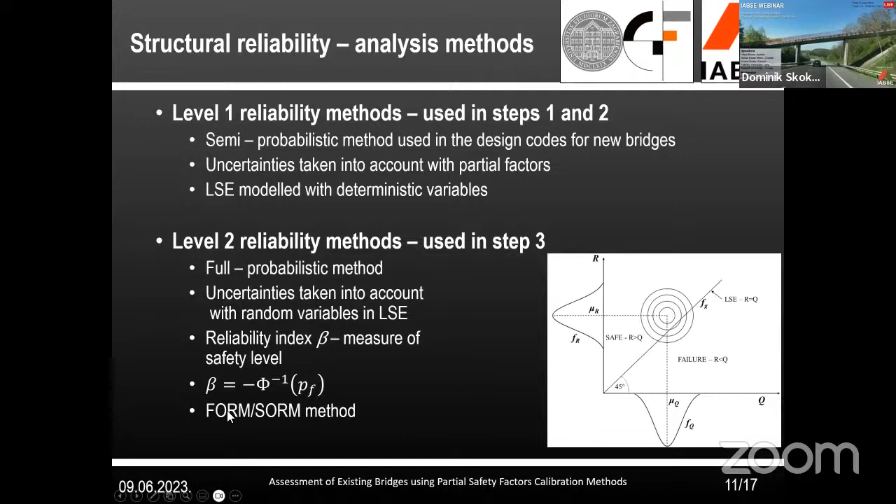Also, just a short introduction, although Andrea already said that in the first presentation: semi-probabilistic method, the one where uncertainties are covered with partial factors, is used for this multi-level analysis, but also for step 3, full probabilistic method is used in order to showcase the benefits of the full probabilistic approach, and FORM, first order reliability method, is used in particular for this case study bridge.

So first of all, we needed to define the limit state equation, which, although it looks complicated, is rather simple. We have a bending moment resistance of the bridge and the bending moment which is acting on the bridge. That one is just a superposition of bending moment of self-weight, additional dead load, and traffic load, each with its own uncertainties.

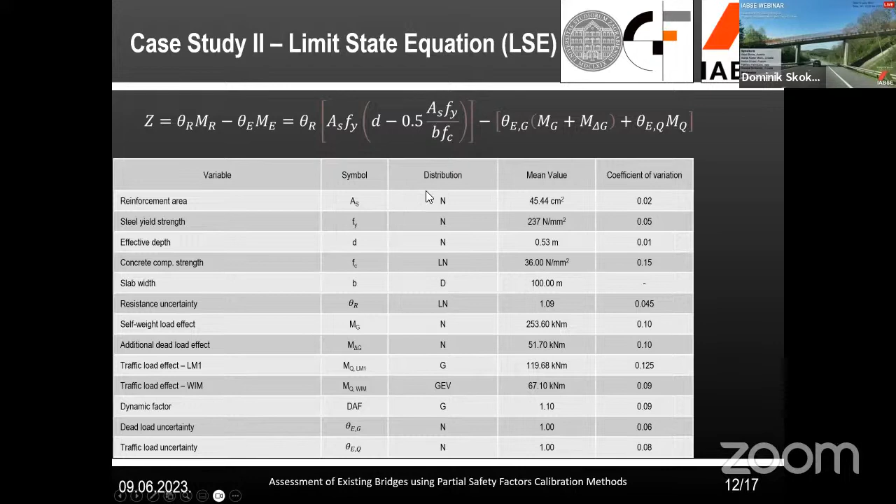For the first two steps, we use the target values as prescribed in the Eurocodes, and the partial factors as you will see now. So in the first step, we use partial factors for new bridges: for material 1.5, 1.15, and for both permanent and traffic load 1.35. These are the values for resistance, value for load effect.

Here, dynamic factor is not taken into account, or it is taken as 1, because Eurocode traffic load models already have a built-in dynamic factor. You can see that the result is presented as a ratio, similar as in case study 1, between the load effect and the resistance, and as in the first step it's 135%, which means that the bridge cannot be assessed as safe. It's really simple: if this ratio is over 100%, you cannot assess the bridge as safe.

Therefore, we proceeded to the second step, in which we used the reduced partial factors obtained with the design value method, as Maria showed you in the first part of the presentation. You can see them here: for concrete it's 1.34, steel 1.11, permanent load 1.31, and traffic load 1.05. So both the resistance and the traffic load effect change - resistance has increased and traffic load effect has decreased - and therefore the ratio is a bit more, a bit better, but it's still over 100%, which means the bridge is still not assessed as safe, and therefore we proceeded to the third level.

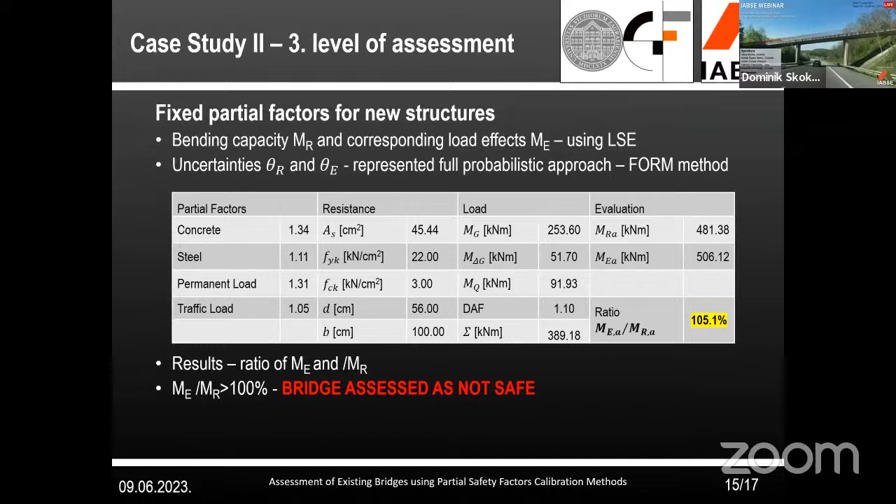And in the end, we conducted a full probabilistic analysis based on this limit state equation and the corresponding values. And for the third step - unfortunately it's not in the presentation, I forgot - but in the third step, we obtained a reliability index of around 4.2, which means that the bridge can be assessed as safe in the final step of the assessment.

So, to conclude, we have a nice comparison of three levels: here, partial factors for new bridges, then adjusted partial factors, but in the first two levels traffic load models are used for new bridges, and in the third level, traffic load model is based on the measurements, so a site-specific load model. Using the semi-probabilistic approach, we can see the decrease in the ratio.

In the end, it's still over 100%, but when we used the full probabilistic approach, the corresponding reliability index was over 4, which means that we can assess the bridge as safe for the chosen reference period.

So these comparisons, I think, represent really clearly the effect of using reduced partial factors.

That's the first one. Then the benefits of using site-specific load models when the data is available. And in the end, the benefits of using the full probabilistic approach, because using the semi-probabilistic one, we are very near to the bridge being assessed as safe.

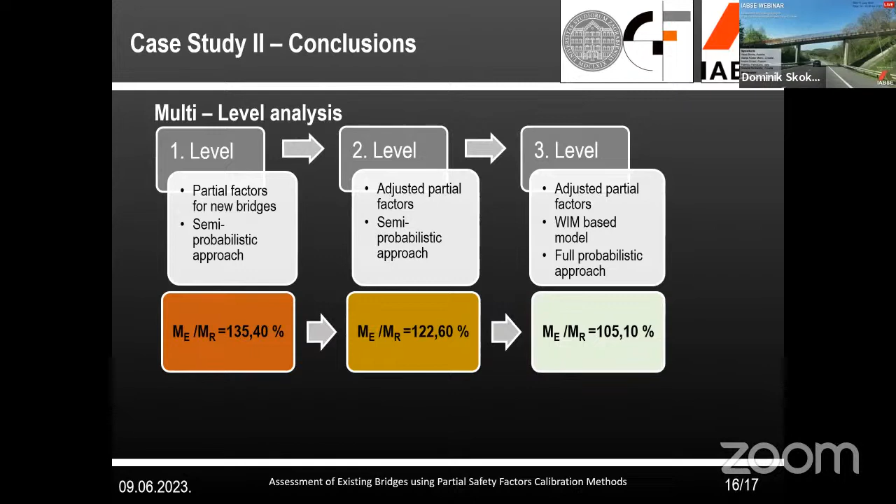But when we use the first order reliability method, full probabilistic approach, the bridge was assessed as safe. And with that, I would like to conclude, I think, all today's presentations. And if I'm not mistaken, now we have some time for Q&A session. So thank you for your attention.

Thank you very much, Dominik, and thank you for soldiering through when you weren't feeling great. So that was super. I'd like to thank all our speakers today for a very complementary and comprehensive set of presentations.